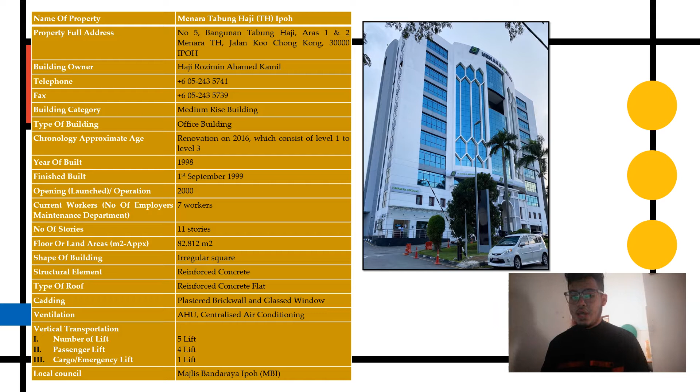The cladding is plaster, brick wall and glass window. There are 2 types of ventilation, which is air handling unit and centralized air conditioning. The vertical transportation has 5 lifts, consisting of passenger lift, cargo and emergency lift. The local authority is Majlis Bandaraya Ipoh.

For the company details of Tabung Haji, Tabung Haji was set up by the government of Malaysia in 1963. It's a legislative body providing facilities for Malaysian Muslims to save for Hajj. TH is controlled by the Tabung Haji Act 1995, Act 535. Tabung Haji has over 50 years of experience in the field of savings, financial market and expenditure. As the country's only Hajj institution, TH strives to improve the economy of Malaysian Muslims through the use of the fund and resources available.

There are several types of facilities and utilities provided at this building. The first is parking, the second is ATM machine, the third is small shop, the next is front desk, surau, cafeteria, toilet, Dewan Serbaguna, and ramp for disabled persons to enter the building.

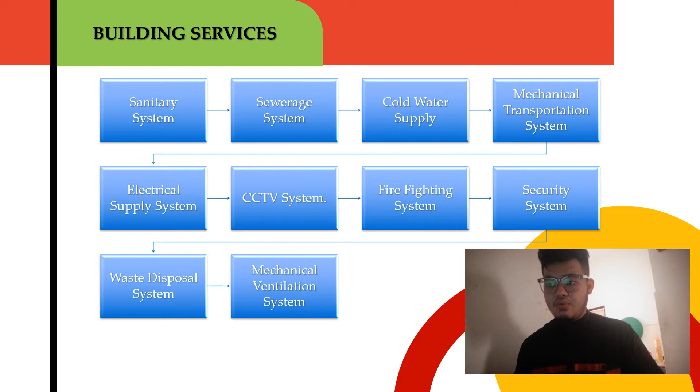For the building services, there are 10 types of services, which is sanitary system, sewerage system, cold water supply, mechanical transportation system, electrical supply system, CCTV system, firefighting system. There are 2 types of firefighting, which is active and passive firefighting system. The next is the security system, the waste disposal system, and the last one is the mechanical ventilation system.

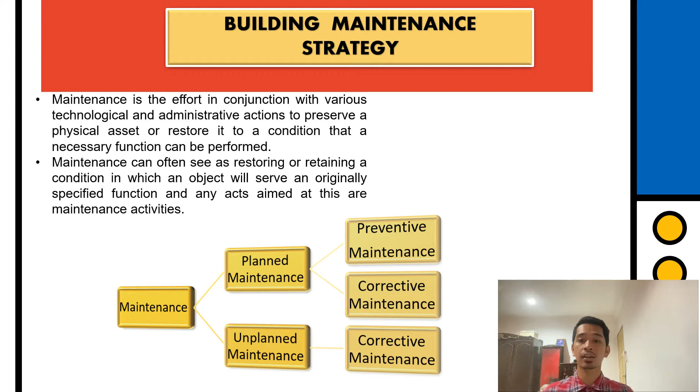For the maintenance strategy, Menara Tabung Haji uses maintenance strategies such as planned maintenance and unplanned maintenance. Maintenance is an effort in conjunction with various technology and administrative action to preserve a physical asset and restore it to a condition where its necessary function can be performed.

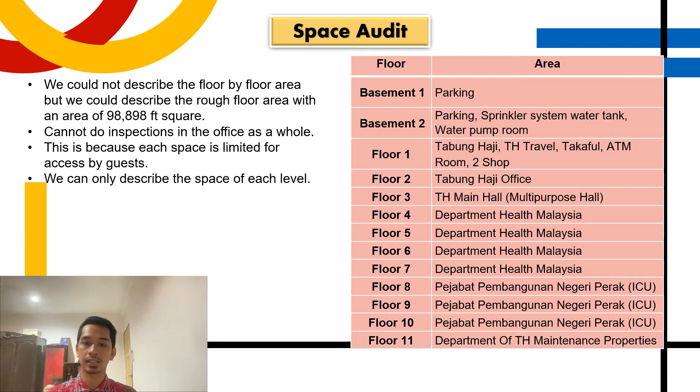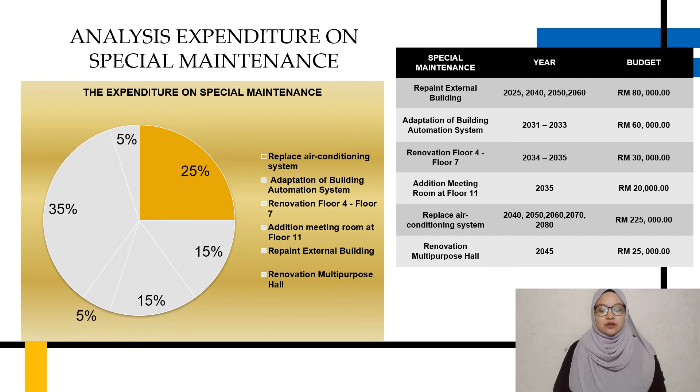There will be an extension on the list of refurbishment, which is the meeting room at floor 11 in 2035. Lastly is replacing the air conditioning system every 10 years.

Next, I will explain the pie chart of overall maintenance work in the case study. This overall maintenance is the budget expenditure for any emergency maintenance related to utilities such as water and communication problems. Not only that, it is also for services such as waste disposal, security system, cleaning, landscape, and sanitary fitting system, as well as mechanical, such as elevators, sewerage, generator, and firefighting system.

Commonly, problems will be electrical, such as lighting, fitting, and wiring. The 100% shows that the budget for every year is fixed with an amount of 20,000 ringgit Malaysia.

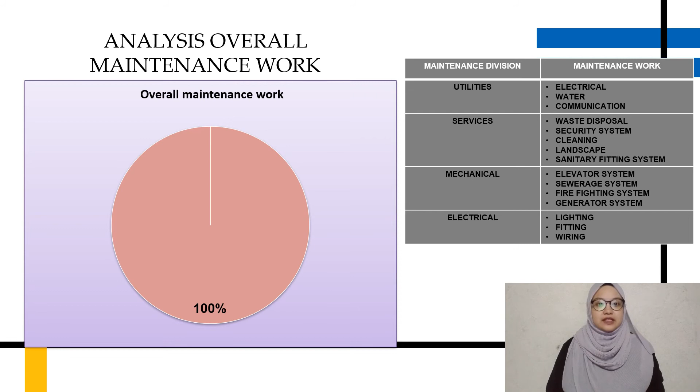Based on the findings, there are some issues with their maintenance management operations, which are the method for complaints and an inefficient energy saving plan. The complaint can only be made by complaint form or phone call, which is quite inconvenient for people nowadays, since they have to go to the office to fill the complaint form, which is quite troublesome. The energy saving plan is also applied on self-control or manual, where they have to follow the timetable of service operation.

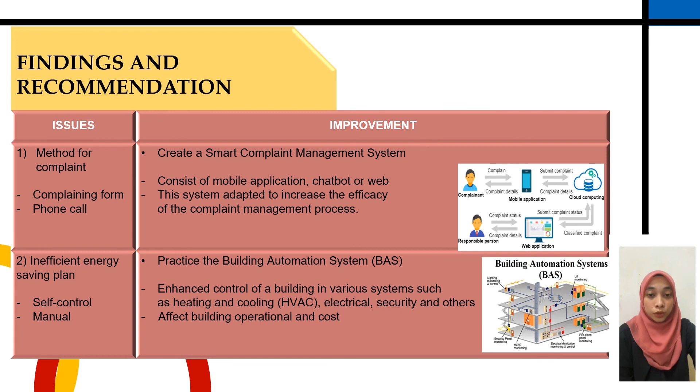Thus, these companies are diligent in managing their incomes and expenditure. They always have good future planning, especially for energy saving, to reduce their annual expenditure. In addition, they are always committed to giving good customer service for their own tenants.